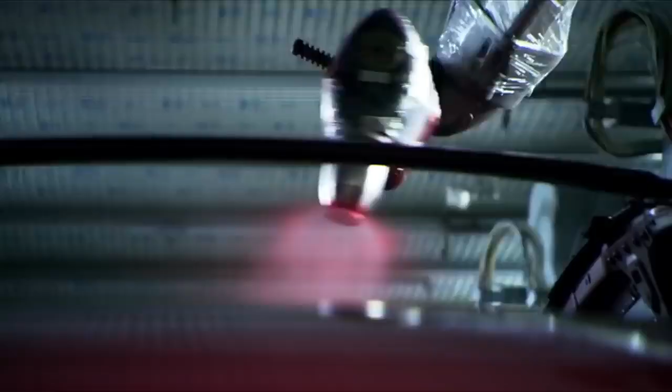This man has a vision to create the best electric cars ever seen and consign gasoline to history. This is something truly revolutionary. He wants to build his unprecedented Tesla car in a futuristic new factory and trigger an electric transport revolution. It's been a long time since something like that happened in the car business, but it's here. It's a dream many have had, but none have realized.

Aluminium bodywork, 19-inch alloys, and a $50,000 price tag. At first glance, this car is the latest in a long line of high-end sedans. But that is where the similarities end. The Model S is a totally different type of car. Tesla believe it can lead a revolution and change the face of motoring forever.

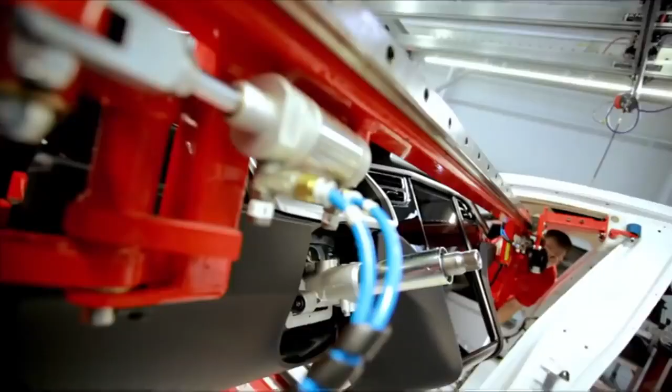It's the first ever mass-made premium sedan powered purely by electricity. Designed to have speed and range, and not a drop of gas. Our goal is to create an electric car that is the best car in the world and show that that's what an electric car can be. Tesla's goal is to kill off the combustion engine and prove the electric car has finally come of age. Driving a gasoline car is going to feel like yesterday. Driving this car is driving the future.

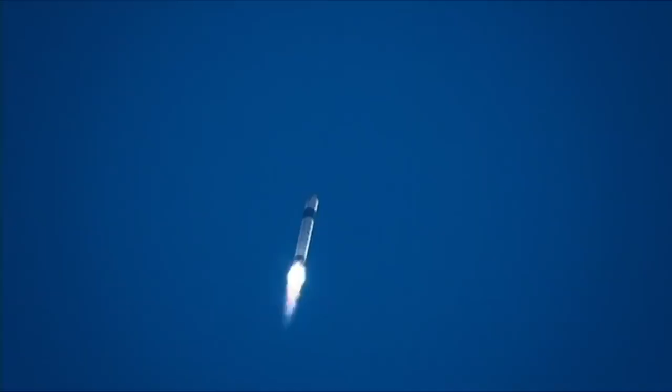This is Elon Musk, Tesla's co-founder and CEO. Elon is an inventor and a maverick entrepreneur, one of America's youngest billionaires. I like exploring, I like technology, I like creating things that have never been seen before or even imagined before. He is a genuine Silicon Valley success story. In the mid-1990s, Elon set up a small internet company. By 2002, he'd sold PayPal for $1.5 billion. Next, he founded private rocket company SpaceX. It's all part of Elon's life mission.

When I was in college, I tried to think about, well, what are the areas that would most affect the future of humanity? So the three things were the internet, making life multiplanetary, and the third being sustainable energy. So that's what really ties together my companies, is that sort of thought from 20 years ago. Tesla Motors is Elon's sustainable energy brainchild. Named after electric power pioneer Nikola Tesla, it's a car company that only makes totally electric vehicles. No hybrid and no alternative fuels. Absolutely no tailpipe. The company estimates their electric cars cause 50% less CO2, even if much of the electricity comes from a coal-powered plant.

It's technology Elon and co-founder J.B. Straubel believe we need. We're solving problems for our children, our grandchildren. Oil is a finite resource, and eventually we have to find alternatives. When you take that oil out of the ground and you burn it, it's extremely dangerous. We should not play Russian roulette with the atmosphere. We only got one. Tesla's founders have a vision of a world without gasoline cars. They are convinced electric is not only cleaner, but better. Now, they want to prove it to the world.

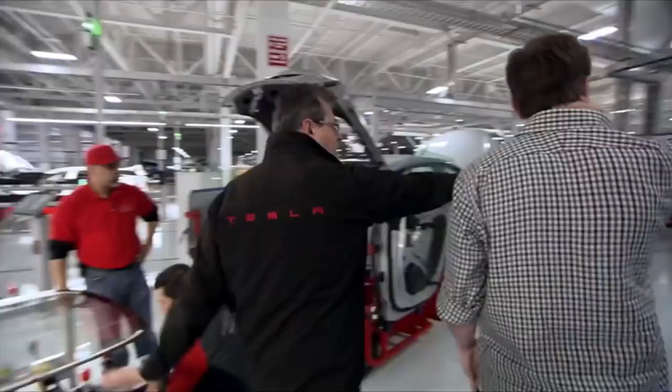Elon brings in Gilbert Passin as head of manufacturing. Gilbert is an expert from one of Toyota's award-winning plants in Canada. His description of my job to me was very simple. You know, you've got to create the best factory in the world with the best people in the world and make the best premium car sedan. And I said, okay, so where's the factory? Well, you have to find one. Where's the team? Well, you have to make one.

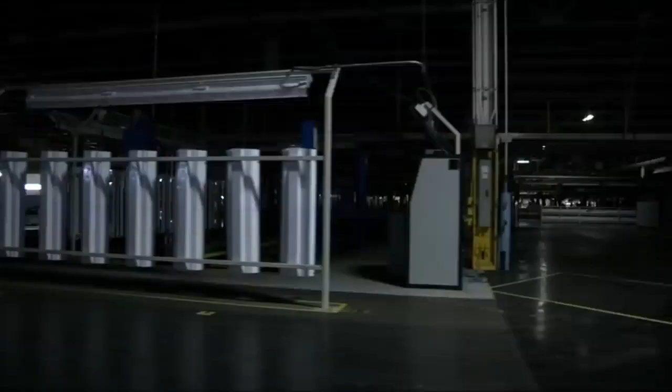The company purchased a former GM and Toyota site in Fremont, California, on the edge of Silicon Valley. The abandoned facility is a traditional car factory. Dark, little natural light, bare concrete floors. When Tesla Motors move in, it's the birth of a mega factory like no other. It's a totally fresh approach to car manufacture.

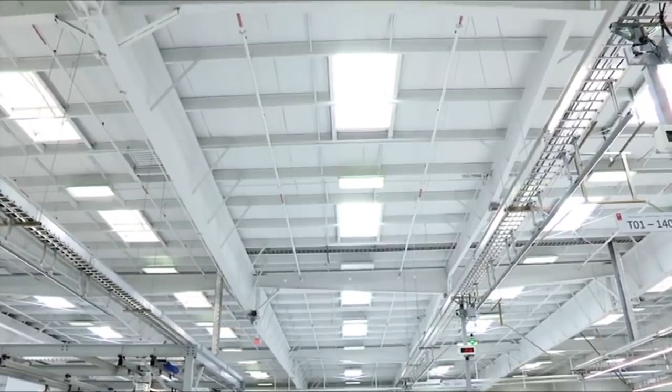The walls and floors are painted white. The machinery a striking red. Skylights and windows flood the factory with sunlight. If you make the factory pristine and clean, that sets the tone for the vehicle. We want that same sense of quality and precision in the car itself.

As part of the whole company ethos, bikes are provided so the workers can get around the factory. I think it's important to have an environment where people look forward to coming to work. So it's worth putting some effort into making the factory beautiful.

In true Silicon Valley style, they fill the space with the most advanced technology, creating an automated production line capable of building tens of thousands of cars. Super efficient multitasking robots, self-guided smart carts, and computerized production schedulers. The factory is designed to be up there with the very best in the world.

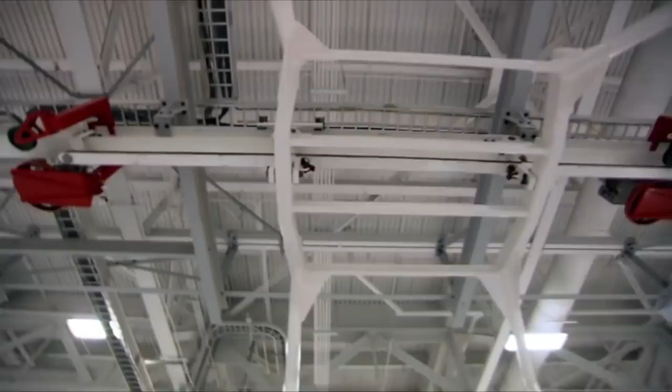We love engineering. We love beautiful machines. We love new technology. We love to innovate with high technology. And also in manufacturing, we love to do that. Without training, these sophisticated robots are useless. They all need to be taught before they can run tasks automatically.

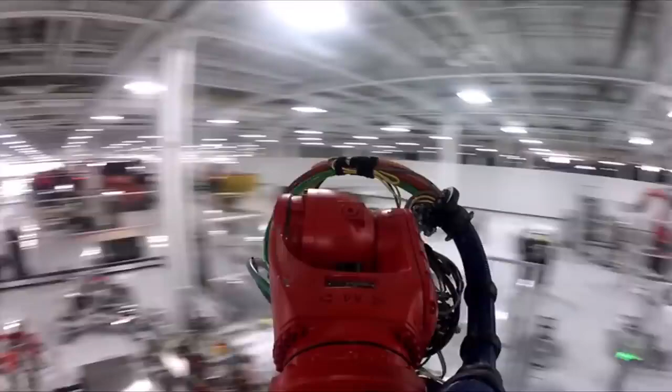Every robot is programmed by hand. The Tesla team has meticulously trained 130 sophisticated robots over a year and a half. One of the last robots still to be programmed is a multi-point welding robot. It will be used to join the car's underbody. These are pretty busy robots, so we gotta make sure that our takt time is good.

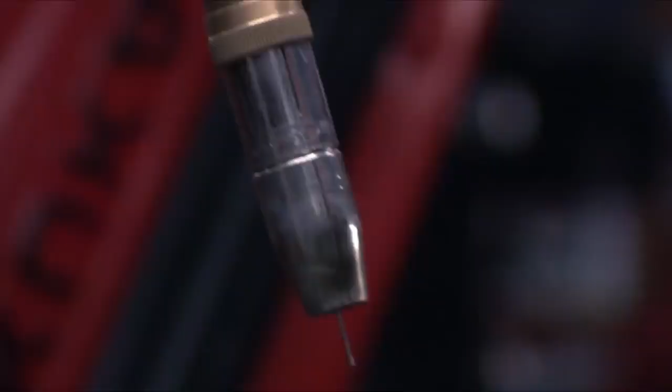A robot's work is only as good as the man who trains it. Brad Johnson is a welder with over 25 years' experience at the highest level. Getting this done today, we'll have the teachings all nice and smooth, and then we can start running 100% in full automatic. That sounds good.

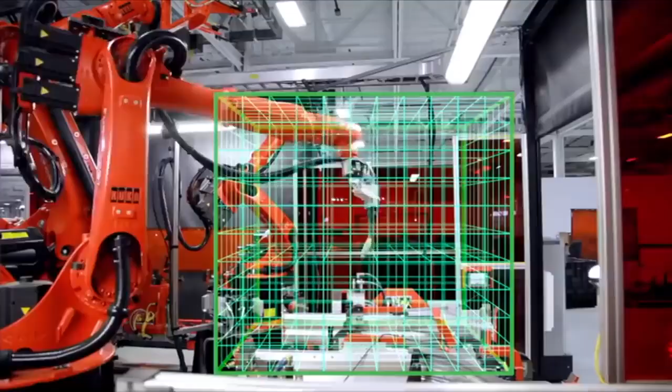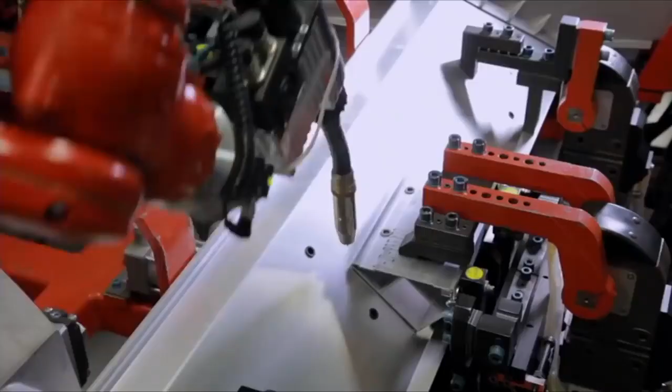The space in which the robot operates is treated as a three-dimensional grid. The head can be manually guided to any point using a teach pendant. There's our start point and our weld position. Brad guides the robot millimeter by millimeter and uploads the coordinates. The robot works out the most efficient route and runs the program.

Looks like the teaching is right on mark, and we have a really good quality weld right here. So we should be able to run full auto with this weld. When full production begins, Brad's handiwork will be exactly replicated by the robot 100 times a day.

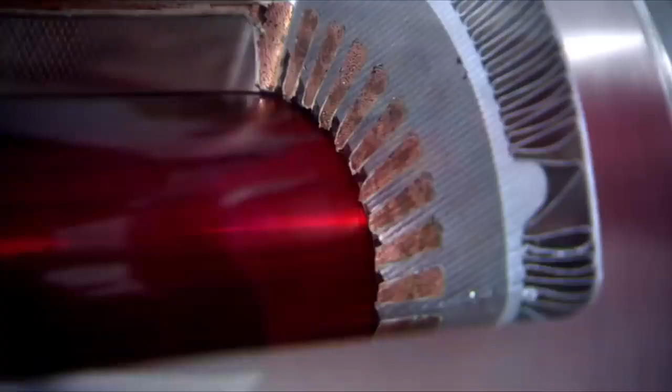Since their inception in 2003, Tesla Motors have been pursuing their electric car revolution with a step-by-step strategy. In an unconventional business move, Elon decreed that Tesla must invest in their reputation first and worry about profit later. Stage 1. Make a small number of high-value cars that prove electric power can be desirable. The Tesla master plan is very simple. We start off creating an expensive, low-volume car to help break the mold in electric vehicles.

Plan in place, they set to work on their first car, basing it around the British-built Lotus Elise. 5 years later, they released the Tesla Roadster. Quicker off the blocks than an Aston Martin Vantage, the electric sports car astonishes the motoring world. Step 1 complete in the Tesla strategy. What we showed was that an electric car could be sexy, it could be fast, and it could be long range. And that if you produce such a car, that people would buy it. But as a $100,000 two-seat sports car, it's a luxury second vehicle to most of its owners.

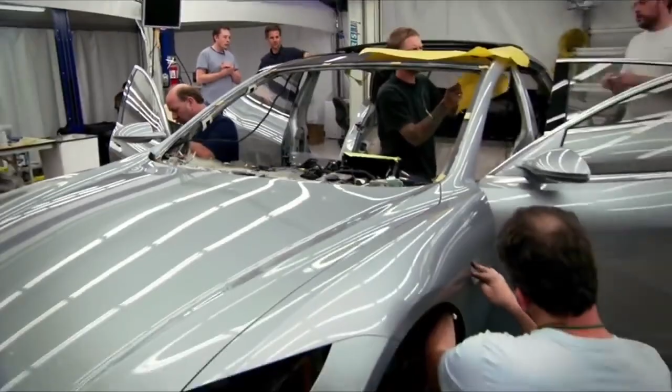Time for the pivotal Stage 2 in the master plan. A car that costs half as much and sells in much bigger numbers. A very important step in the Tesla strategy is really going to show that a mainstream electric car can be better than a gasoline car. The Model S is the second step in Elon Musk's vision of an electric revolution. A premium mass-market sedan designed and built from the ground up by Tesla.

At the studio in Los Angeles, they are working to craft that car. The Model S is really the foundation of Tesla. It's the first true product designed, engineered, built, manufactured by Tesla. And it's really the beginning of what our mission is about.

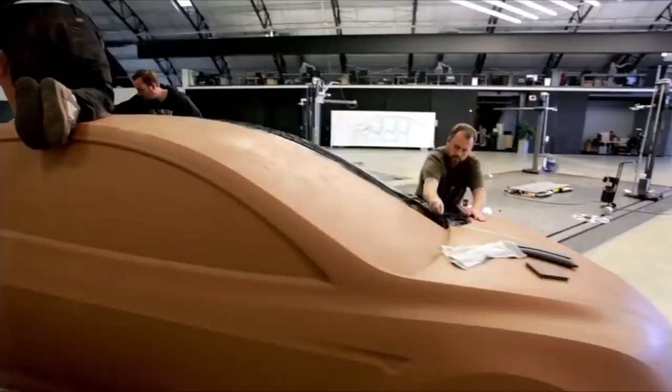Franz von Holzhausen is the chief designer. He believes Tesla's design needs to have some conventional appeal. It's really easy to have a clean slate and go pretty crazy with that. We had to start with something that people could relate to. If they even knew or cared that it was an electric vehicle, they were attracted to it.

We've stretched the sedan and made it a little bit more modern, but it's still a sedan. It still has this somewhat traditional cue, and so it's easy to love because of that association. Although uniform in appearance, the Model S is a unique car. It was conceived as electric. Even the shape is designed to maximize the battery's range.

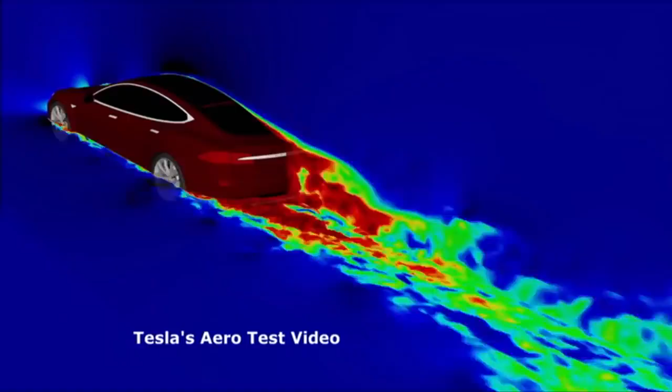And the body and the waist here is all slim, so there's no excess fat or body mass on this car. And that's another one of those elements that just translates into great efficiency. This car is one of the most aerodynamic sedans on the market. In an electric car, conserving the battery power is so important, the designers put huge efforts into reducing the drag. Even the door handles are aerodynamic, receding flush into the body.

But it's the interior that is most heavily influenced by the electric powertrain. The powertrain is incredibly small. You get the same performance out of a motor that's the size of a watermelon, that fits between the rear wheels, and everything else above that is what I call the opportunity space.

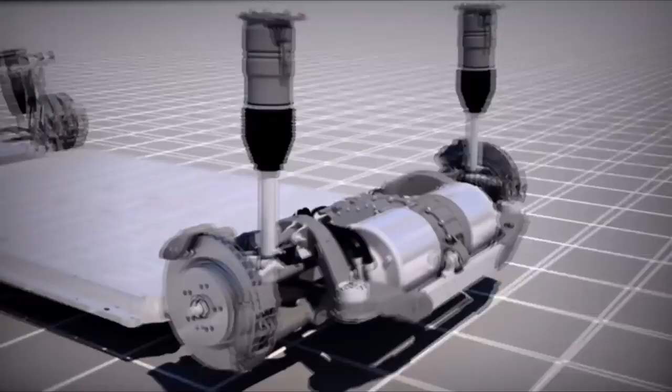The design team started with the motor and flat battery pack and worked upwards. With the motor next to the wheels, there's no need for a drive shaft, so there is no rise under the rear middle seat. There is no fuel tank or transmission. The Model S has free space from the floor upwards.

What you'll see is a vast amount of space. In fact, it's actually so big that we decided that we could actually fit 7 people, and we do that by putting 2 rear-facing child seats in the back here. And you can see where they fit here, and their legs go right down in there.

So this is what we call the frunk, and it's really the trunk in the front of the car. And arguably, you can put a whole bunch of stuff in here, even when the back of the car is totally loaded up with people and kids and stuff. And who doesn't need one of these?

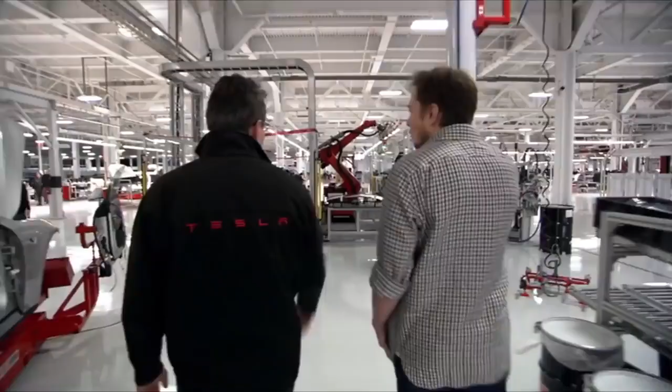Tesla promote these unique features at every opportunity. As a new marque, they're trying to make an impact in a marketplace crowded with established big hitters. Just looking at the United States, of the 3 other car companies, the youngest is 90 years old. So clearly this is not an industry that has been supportive of newcomers.

The Geneva Motor Show 2012. Another leg in the company's relentless promotional campaign. We're done selling Roadsters in North America, so this is our product. It's our product, Tesla product, and therefore we need to get it out to start selling.

Industry experts are judging Tesla on the Model S. It's seen as make or break. Maybe Tesla has a bright future. I think the Model S is very decisive to see if there will be a great future or if there won't be a future at all.

The company have taken the risk of collecting prepaid orders on the car. They've amassed nearly 10,000 advance sales. The financial boost also creates real pressure. I get harassed quite a bit actually by some people who have reservations, and it's a lot of expectations, very high expectations that we're going to have to meet and exceed, really. Some prepaid customers have been waiting up to 3 years for their car.

In return, they've been promised a delivery deadline. I do feel an incredibly strong obligation to those that have placed their faith in Tesla and put down deposits. I'll do anything to make sure that their faith is not misplaced. The delivery deadline for the first cars is now only 2 months away. But the brand new factory hasn't built a production car yet.

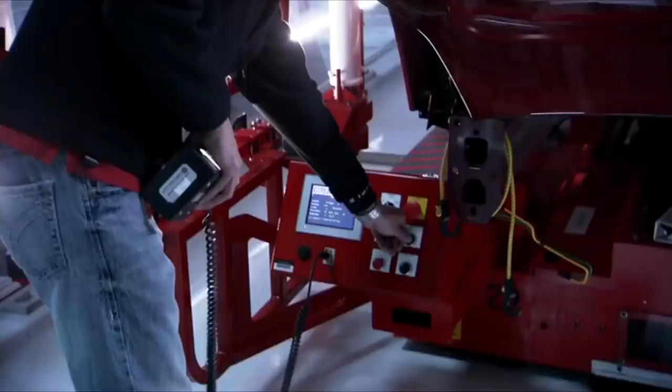But before mass production can begin, Gilbert and his team must prove the factory is ready. The company is relying on them to get it right. We have to make sure that car after car, the quality is there, everything is perfect along the way. So we are really gearing up towards a production ramp-up.

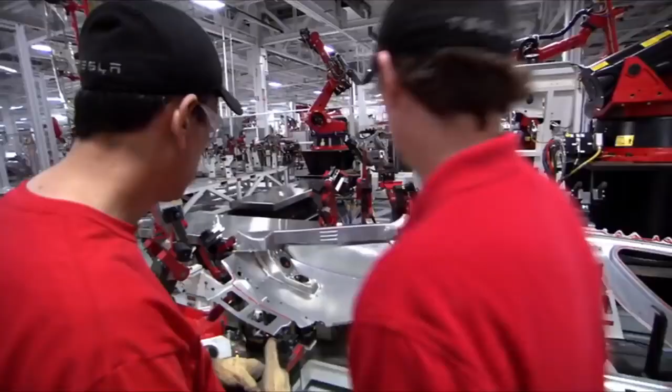Over the next few weeks, the factory will test manufacture a limited number of Model S. If the line doesn't perform with these cars, the company will be forced to miss their deadline. Tesla's electric revolution would be over before it started. A very, very important moment is the birth of Model S in our Tesla factory. And it's where the rubber is going to meet the road, so to speak.

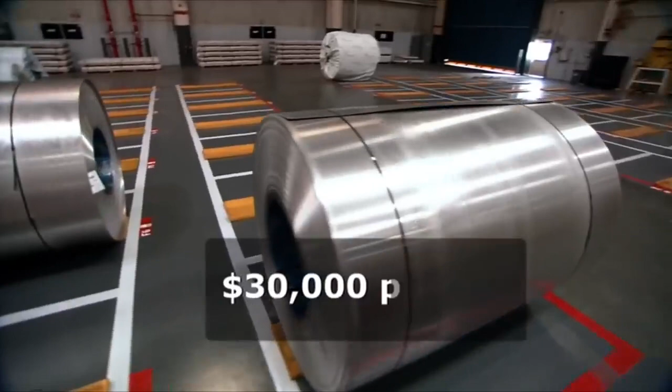The process begins in stamping. To increase the battery's range, the company have decided to build 97% of the Model S with lightweight aluminium. It's an extremely rare feature in a mass production car due to the cost. Every Model S starts as one of these. The roll is loaded into the mechanical cutting machine.

Once cut, the panels are passed to the stamping press. We need to translate flat pieces of aluminum into 3D forms. And how to do this with aluminum stamping with the level of quality that we expect is really, really challenging.

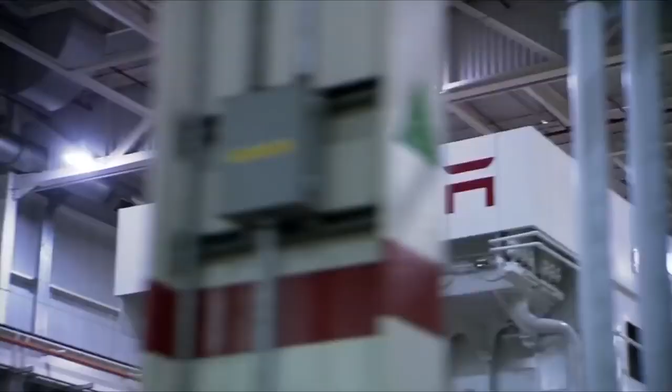To meet the challenge, they buy the largest available stamping press in North America. It's one of the first pieces of equipment they install. Over 3 stories high, it has to be transported from Detroit on 70 trains and then entirely rebuilt.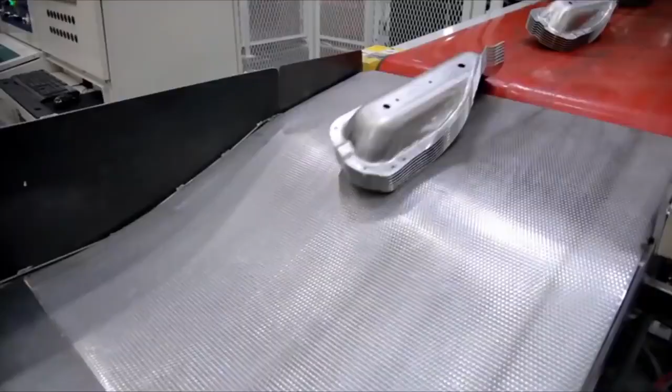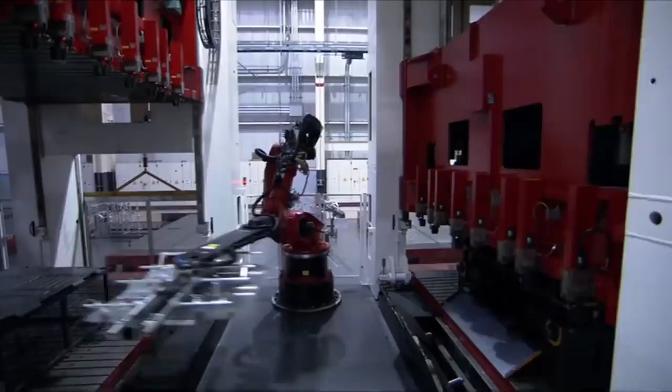The immense pressure from the stamp allows them to press the complex body shapes needed for the Model S. It can be mounted with different heads, known as dies, that mold the panels into a wide variety of shapes. Robotic arms feed the 4 stamps. Each stage forces a more detailed 3D shape, producing stacks of floor plates.

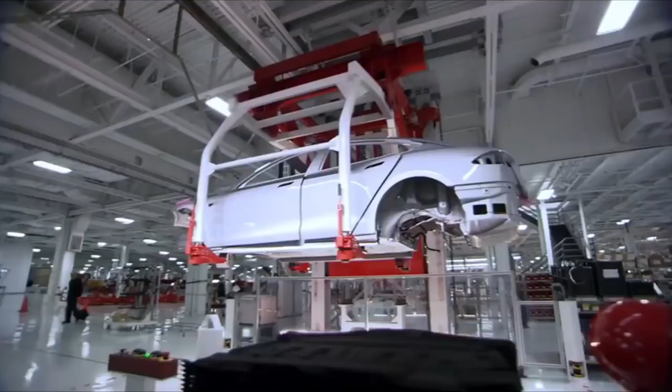These lightweight aluminium parts improve the Model S's power-to-weight ratio, which helps increase the performance and range. The 2 things that obsess co-founder and technical chief, J.B. Straubel. Any ideas on how we can make it better? Performance and range were the 2 big issues that needed to be improved, and that's where we've put most of our focus on the technology and powertrain.

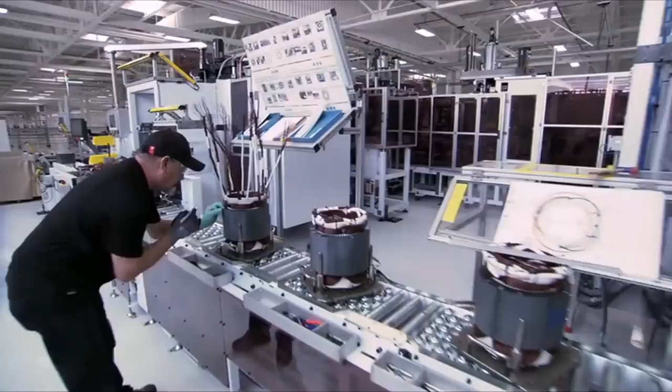Powertrain manufacture, 2nd floor. This is where they build the heart of the Model S, the motors and battery packs. Tesla know the electric powertrain will define their cars, so they push to advance the technology themselves. This is an extremely exciting field where inventions continue to happen even faster than they did in the years previous.

Tesla's solution to improving battery life appears startlingly simple. They use thousands of small lithium-ion cells, similar to laptop batteries. Thanks to these regular batteries, the company say the Model S has achieved a top range of 480 kilometers. Once you have 250 to 300 miles of range, then you're in a different usage mode. You're in a range that is equivalent to most gasoline cars.

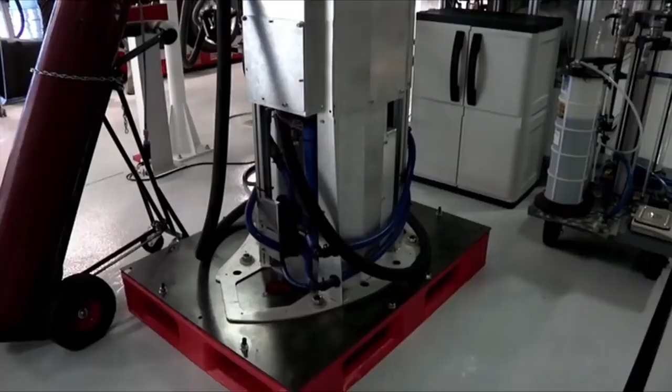The car can be charged by 100 kilometers every hour from a regular power outlet. Ultimately, Tesla are hoping to install superchargers along major highways that can charge the car to capacity in 45 minutes. You can charge the car up every night, but you don't need to. You can actually charge it once a week.

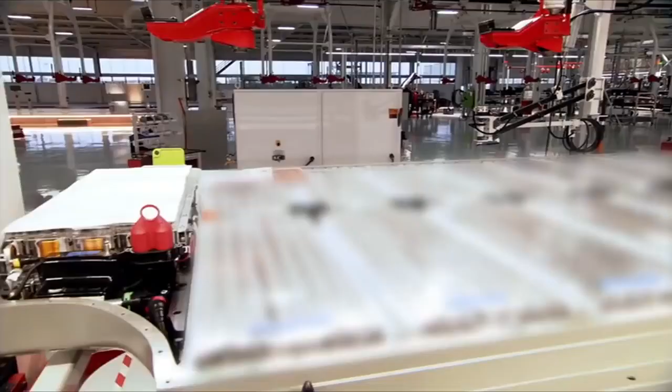The high-performance battery pack is formed with over 7,000 small cells. They're organized into a flat layer with specific groupings of positive and negative. The final layout is the key to the pack's power and range, and Tesla considers it absolutely top secret.

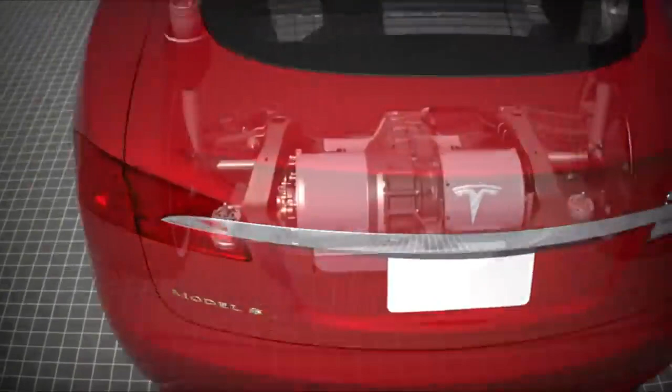The motor unit is also developed in-house. It's essentially an AC induction motor, a concept invented by 19th century scientist and Tesla Motors namesake, Nikola Tesla. He harnessed an electromagnetic field to turn a basic motor. Modern-day Tesla has developed their motor with a highly conductive copper cylinder. When the electromagnetic casing is fed with current, the copper cylinder inside starts to spin.

It's nearly 3 times more efficient than a combustion engine. In fact, there are only 3 moving parts. It connects directly to the rear wheels and doesn't need a transmission. These are the 3 moving parts in the whole Model S powertrain.

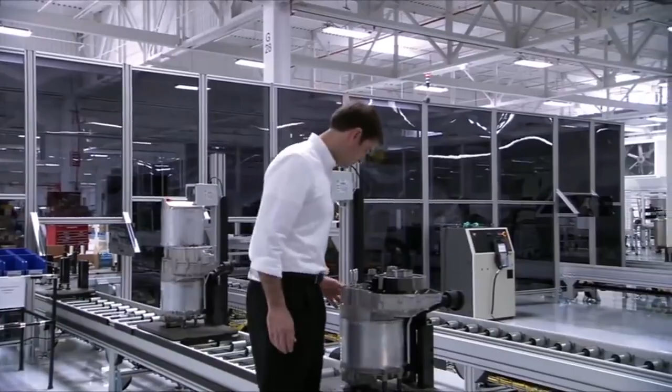One of the cool things also with this very simple gearbox is that when we want to go in reverse in the car and back up, all we have to do is spin the motor in the other direction, and the car backs up. We don't need a clutch, we don't need a separate gear for reverse. The entire drive unit is under 1 meter long, smaller than a golf bag. But it propels the Model S, a family-sized sedan, into the class of performance cars.

In fact, this powertrain creates a totally different driving experience. Program Director Jerome Guillen works constantly to refine it. As with the light switch, electric power can be fully applied instantly. The first thing that's going to surprise people is how much torque you get so quickly. That instant response, you cannot really mess with the throttle too much, because if you push on it, then the car will go.

Even from a stop, you have a very quick takeoff, because basically the torque is instant. So if I stop here and then I start, you will see that we have an acceleration right from the beginning. Any speed, you have that same torque available. So it's very easy to pass a car or to get out of harm's way if needed. Unlike gasoline cars, which have to change gears, the Model S can accelerate to top speed totally uninterrupted.

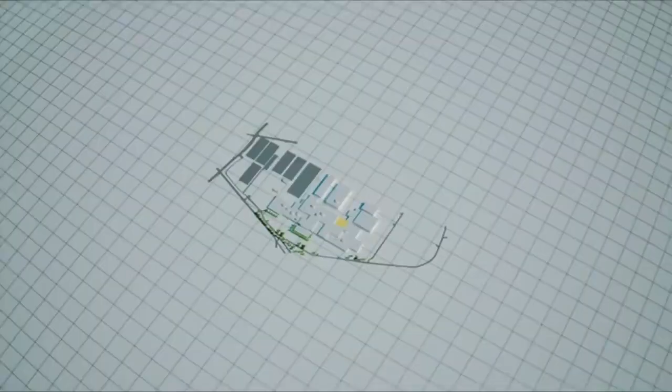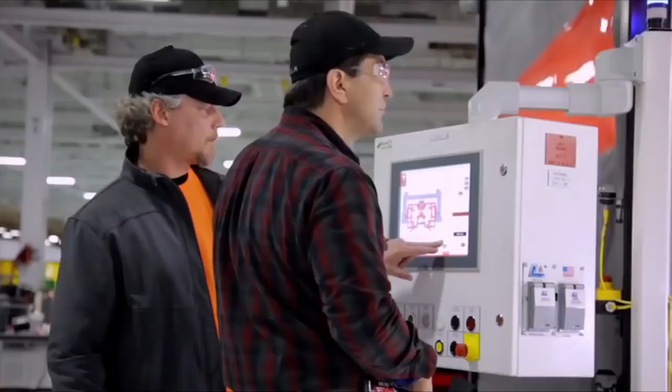In the factory, the delivery deadline is now fast approaching. The Model S test production cycle reaches the main assembly area. The car is based around an aluminum underbody. To make it, engineers weld struts and casts into a framework. Brad's newly trained welding robot is about to be tested in full automation. They have trained the robots with prototype parts. Now, with final components coming through successfully from stamping, it's automated production for real.

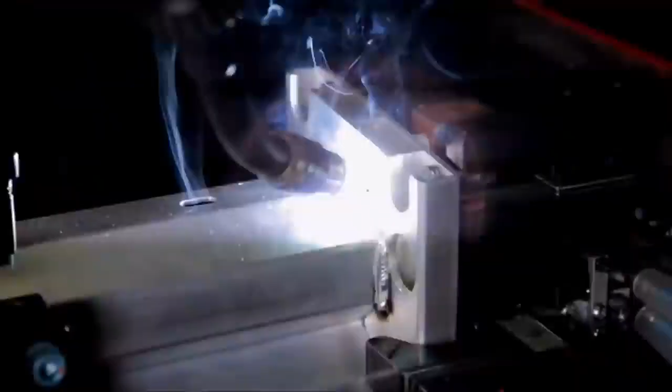Under observation, it's a tense time for the team. The robots work in a tightly coordinated chain. The second phase hits an issue. It shuts the whole process down.

With the deadline looming, Elon Musk is determined to keep Tesla's waiting customers happy. He's organized a Model S test drive event for the people who've placed deposits. The test ride will go out onto Jack Northrop Boulevard, so you'll get a chance to see that this isn't some show car that doesn't actually do what it says. It will go fast and with a lot of people in it. And quiet. Quietly, yeah.

Many have prepaid years ago, and it's their first time inside a drivable Model S. Customer and board member Steve Jurvetson captures his experience on his mobile phone. Wow, this is insanely cool. It's a surreal scene. It's way cooler than I can imagine. You really definitely saw it. Yeah, it's nice. The first ride has to be documented here.

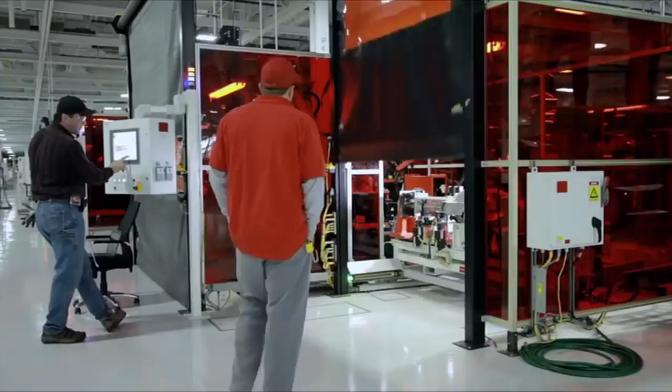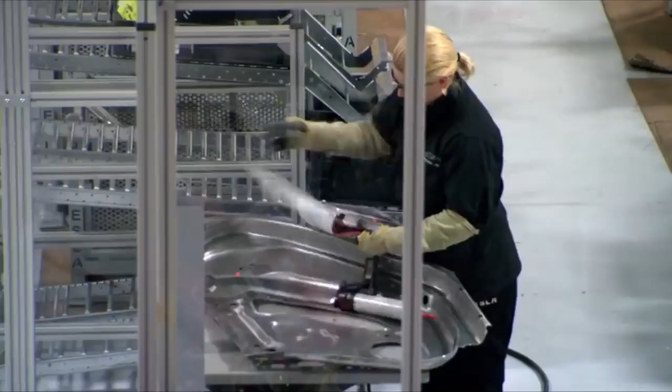The event seems a success. Now the company need to make sure the customers get their Model S's as promised. With only weeks to go, welding has hit a glitch in automation. One of the robotic clamps is millimeters out of line. It's a tiny difference, but enough to disrupt the process. With the way the robots work and how we have such a tight tolerance of 1 millimeter to stay on, sometimes the new parts won't reach a prox, or the clamp won't close all the way. A major delay will disrupt the whole production schedule and threaten the deadline.

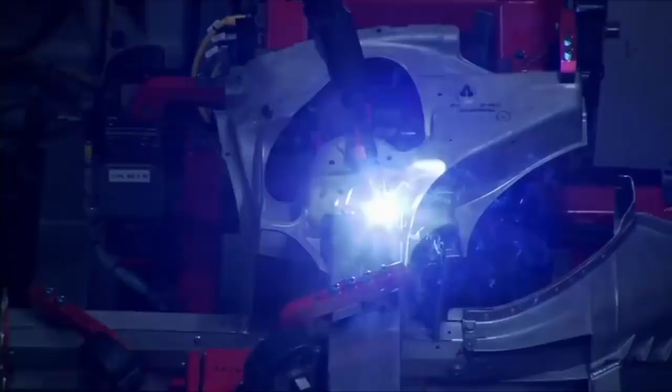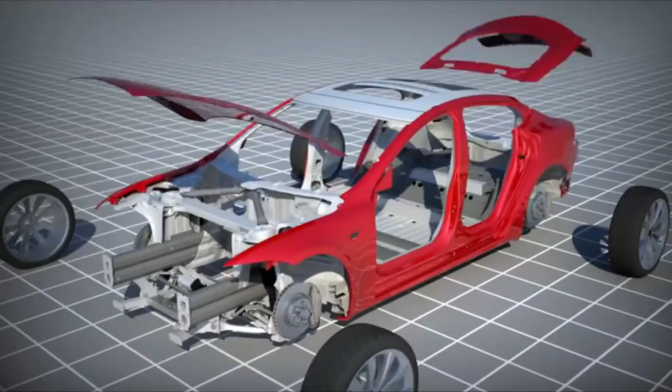They adjust the settings and set the robots in motion again. This time, it goes off without a hitch. To the team's relief, the process can be approved for mass production. The run through the automated line reaches the Model S exterior. The Model S body is made up of 14 different sections. To speed the workflow, Tesla construct each section at separate sub-assemblies.

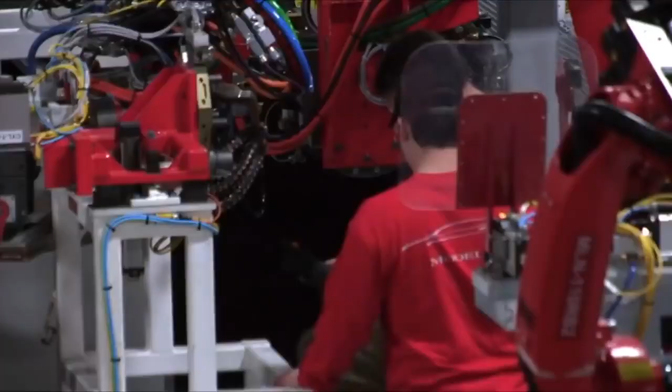Door sub-assembly. The internal frame is joined to the exterior panel. As the robot's pincers come together, they fire a rivet and join the aluminium sheets. Over to the right, side body sub-assembly. One of the most advanced aspects of Tesla's robots is that each arm can perform a variety of different tasks. We have to use all the gamut of technology to make the aluminum joint between stamping and welding and riveting and bonding and all these things using robots that are multitasking.

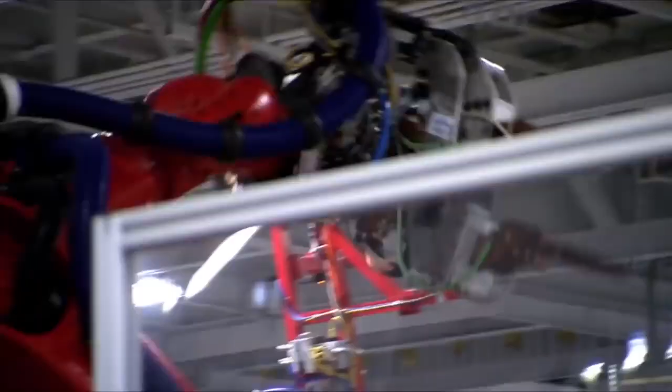This flexibility is essential for a compact and efficient workflow. A robot can spot weld using a pincer tool and then automatically detach the pincer and pick up a clamp tool. The same arm that joined the panels can now move it to the next station. It's clever, but tricky and needs constant refining.

When you draw something yourself, you take a pencil, you take an eraser with the same hand, right? And then you change the tool, so to speak. Same thing here. Once assembled, the sections are brought together at body assembly. Here, they're riveted around the welded underbody to form the basic shell of the car.

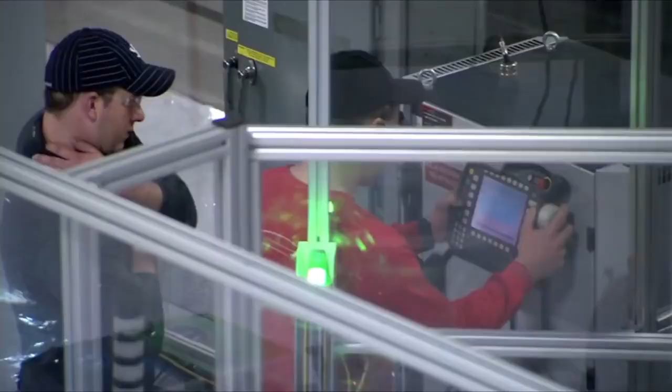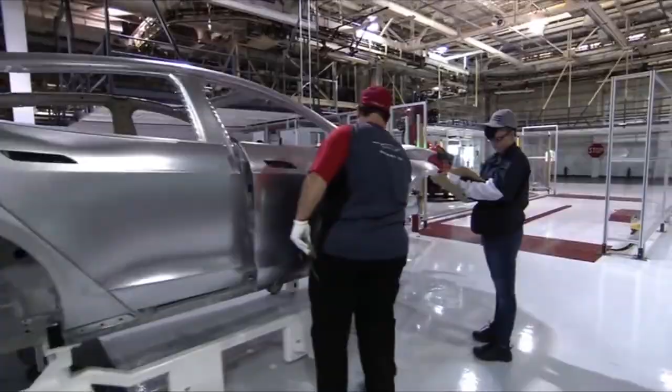All the sections are lined up alongside the central framing line. Gradually, the automated line builds up the side sections, ready to house the doors. A test batch of 3 cars is complete. Body assembly has demonstrated it can run successfully in full automation. It's a vital milestone in the countdown to mass production.

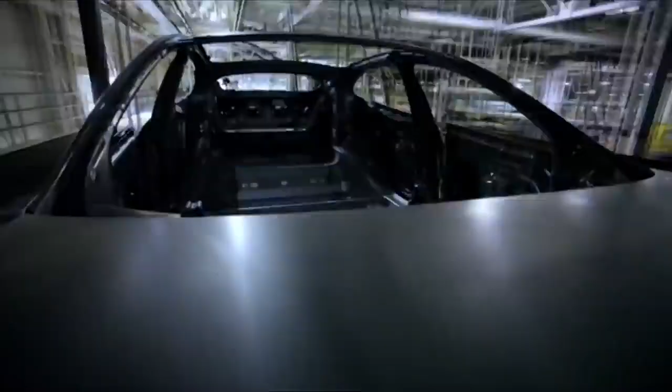Completely assembled, the aluminium body is now known as body in white. It's ready for some colour. The body in white is loaded onto an overhead train that carries it to the paint area. At this vast facility, the paint centre is in a totally separate building. The Fremont site covers nearly 95 football fields of space. It's so big, the Model S production line only fills 20% of it.

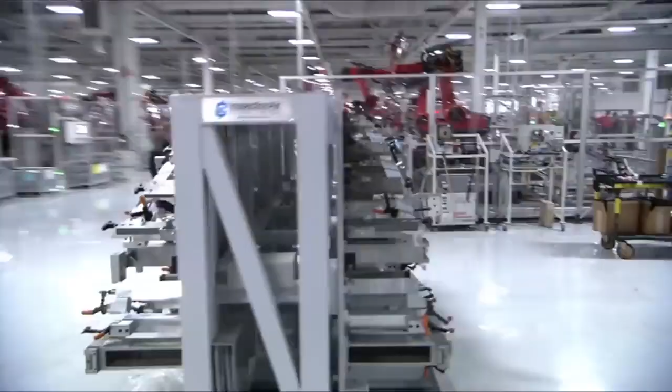For Gilbert Passin, the extra space is the cornerstone of Tesla's grand strategy for an electric revolution. The Tesla factory is huge. It's about 5 million square feet on 2 levels. Right now, we are only utilizing a small fraction of the space, but most of it, as you can see behind me, is what we call the dark side. It's sort of dark and not utilized yet, even though we have a lot of plans for the future on how to fully utilize this entire building.

These expanses are an integral part of the company's stage-by-stage building plan. They want to fill the space with a production line for a further range of Tesla vehicles. A very high-volume, economy-priced model, the Stage 3 car. In the future, we intend to expand our range of vehicles, maybe of a smaller size and also more affordable for the market. And this factory is ideal, and we are going to make this a super mega factory.

Long term, Fremont is meant to produce the low-cost Stage 3 electric car in the millions. It's the final step in Elon Musk's Tesla master plan. To really have widespread adoption of electric cars, we have our 3rd generation vehicle, which would be a low-price, high-volume vehicle, and that's really what's going to fill out the rest of this humongous factory. I'd love to bring this to 500,000 vehicles a year as soon as we can. The future of Elon's strategy first depends on the success of the Model S.

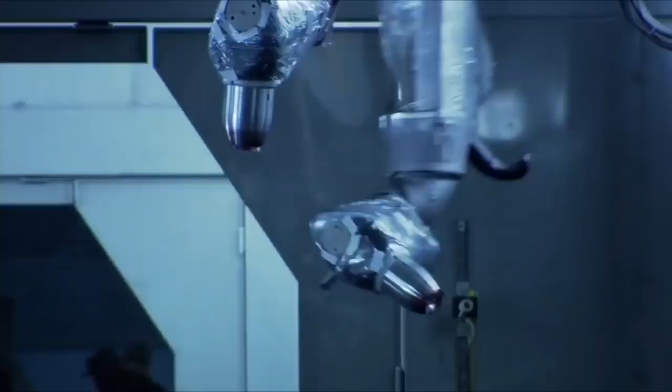In production, the time to the delivery deadline is now running low. The aluminium body arrives on the overhead train from Body Center. Paint Center. This is where they make the car look like a premium sedan. It's a state-of-the-art process. There's a lot of technology that goes into the Tesla car, but the very first thing they'll tell you is what color of Tesla car they bought. That's how important the paint is.

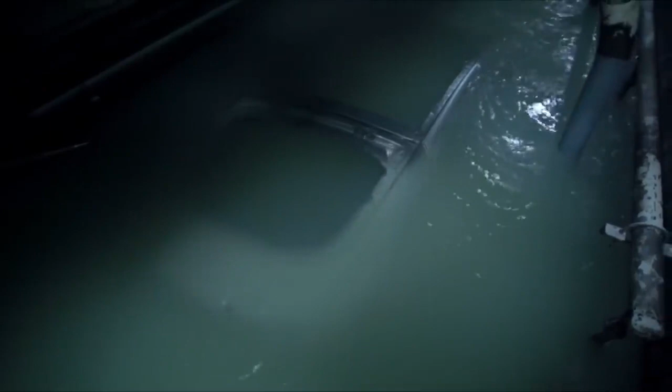First, a roller coaster ride of treatment baths. Detergent to clean the surface, and then electrocoating. The electrocoat helps attract the paint to the aluminium. The primed car is ready for colour. This vehicle will be sprayed with their trademark tint, what Tesla calls Signature Red. It's a color that we developed that's different than anybody else's red. It's been developed with glass flake to get the specific type of sparkle that we want to get in that paint.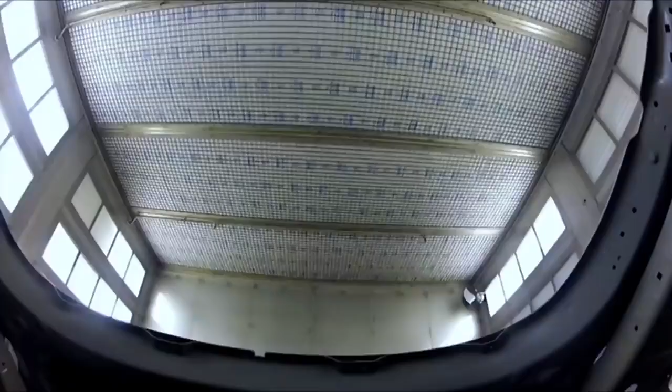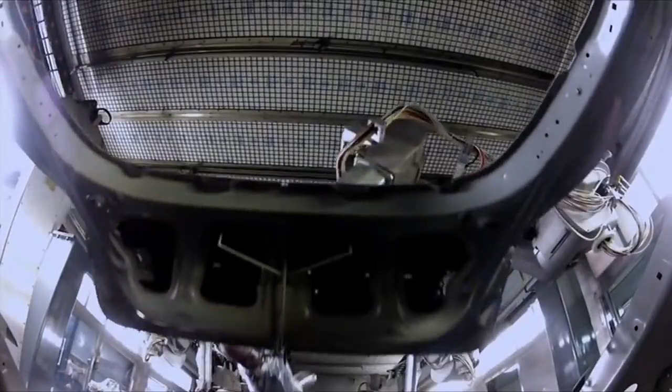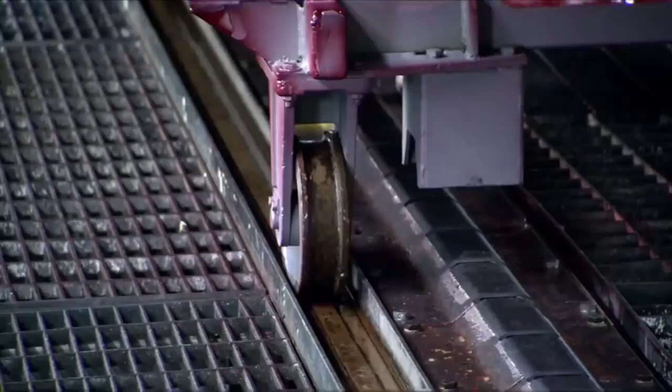It's a masterpiece of perfectly choreographed automation. Even the paint robots multitask, using a handle to open and close the doors. Once it's through, the painted body heads up into the ovens to be baked and double glazed. A specialist team spends hours assessing the finish before the car is passed.

Elon's made it very, very clear to us what his expectation is for the paint job. He wants our paint to look like glass, to look like a piano finish. That's the challenge we've been given, and that's what we're going to do. The Model S spends over a day and a half in paint. And that attention to detail carries through to general assembly.

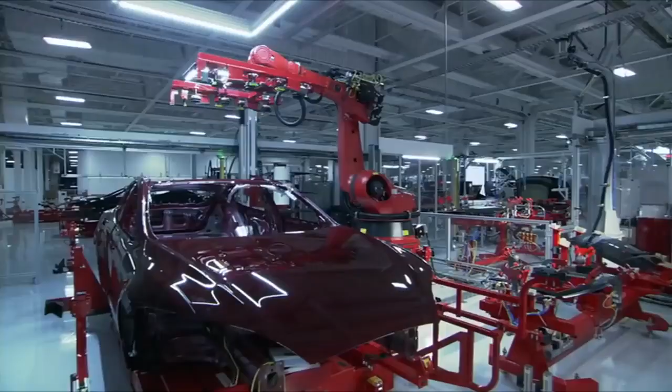First, the Model S's panoramic glass roof. The installation robot takes a picture of the top of the car. It uses the digital picture to measure the exact orientation and bond the glass.

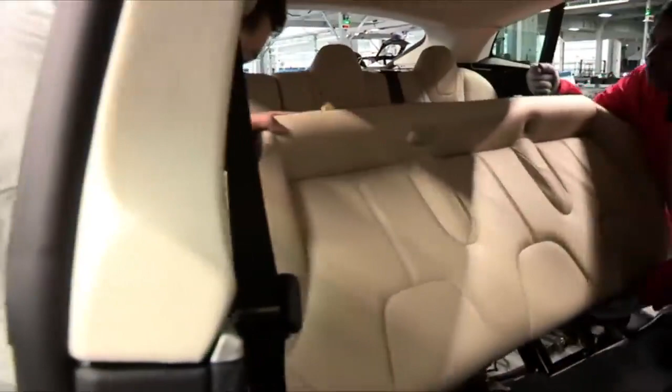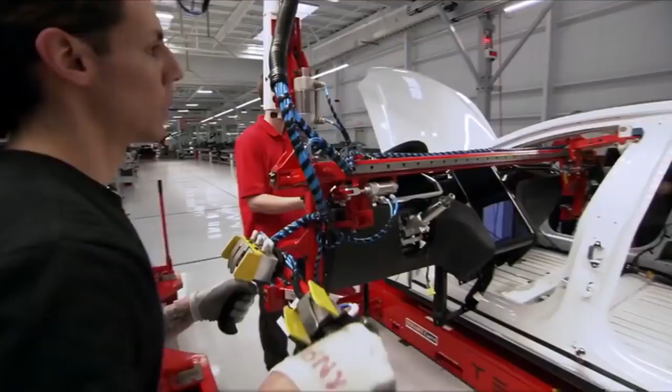Next, the interior. The wiring and seats are fitted. The aerodynamic door handles are installed. To get the delicate installation right, a wireless system adjusts the torque for each bolt. The cutting-edge dashboard is lowered into the car. It's proof the car is a product of the tech-savvy US West Coast.

The Model S carries a touchscreen tablet inspired by Tesla's Silicon Valley neighbors. Tesla is very much a Silicon Valley company that has a Silicon Valley operating system, which is similar to a Google or Facebook or Apple, joined together with a tremendous amount of great automotive expertise. It's about bringing the things that we're used to, our phones, our computers, and the interaction that we have with them into the car.

The car has a mobile 3G internet connection. The driver can download software upgrades and customize the display. The car's always connected to the internet, so we can understand your daybook, and we can know that you're going to work at 8 a.m. on Monday, and the car can be warmed up for that experience.

The entire command center is housed on the 17-inch tablet. The interior is virtually buttonless. It does some really amazing things. Not only does it make the rest of the interior super clean and really uncluttered, it allows you to have just amazing control of the car, and it's just a push of a button. Like magic.

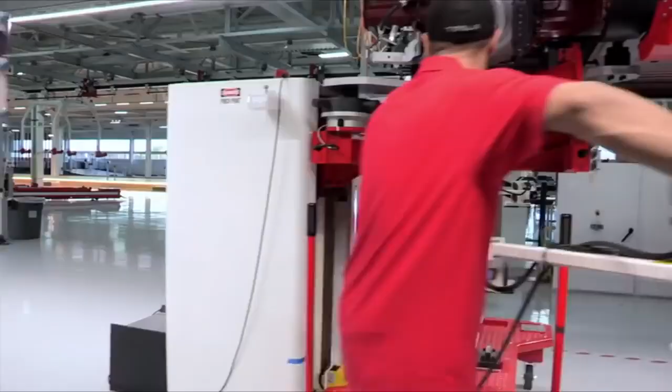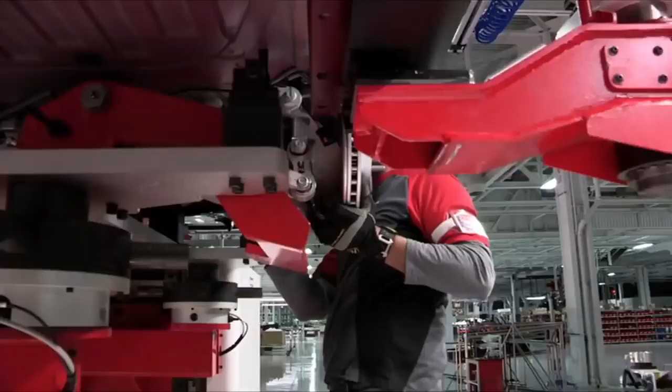At the factory, the start date for mass production is now only 2 weeks away. The first batch of test vehicles reaches the vital final stages: powertrain and body marriage. In gasoline cars, installing the drivetrain is a lengthy process. With electric, it can happen in just 2 steps. Step 1. The motor unit, complete with suspension and brakes, is bolted into the rear wheel berths. There is no drive shaft or transmission to be attached. In one motion, it's fitted.

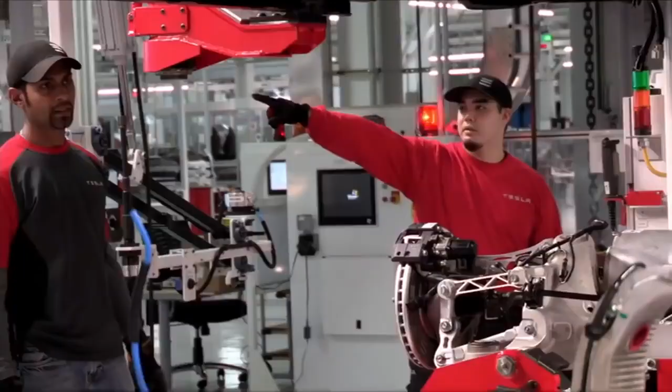Throughout the build, every single time you may hear me in the background saying, we're at 2 minutes, we're at 5 minutes, right? So they can know exactly where they are when we're shooting to get to that 4 minutes and 42 seconds. Step 2, battery pack installation. The pack's steel case acts as the car's chassis. Bolted into place, it gives the Model S its rigidity.

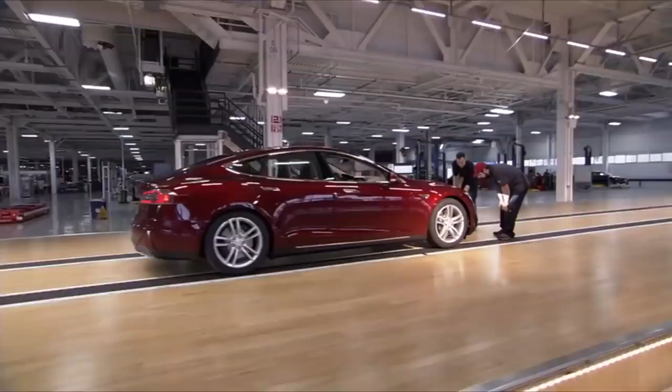A stage along, the first complete cars arrive at final inspection. At Elon's insistence, inspection happens on a bamboo platform. He believes you can only judge a car's beauty if it's framed by beautiful surroundings. The last check is the test drive. At Tesla, the track is very different. Because electric cars produce no exhaust fumes, they can be driven indoors.

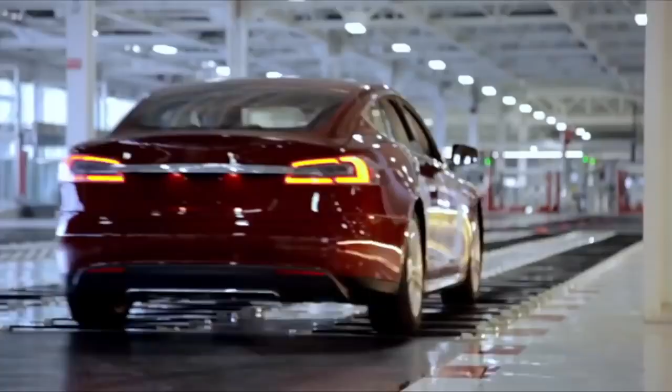Our people have done so well at putting this car together. You can see the remarkable quality of the paint and the entire vehicle, the body fit and everything. I'm so proud today. This is the first Model S to pass through the production test run. And its quality proves the new megafactory is ready for mass production. It's a big moment for the company.

Just to see this car going around the test track here, it really demonstrates the fact that the Tesla factory is ready to go. I just have to make 20,000 per year more of this kind, and it's sort of a done deal. We just have to get it done. The factory can now push towards the delivery deadline, allowing Tesla to pursue their strategy for an electric car revolution.

Can you imagine if all the cars in the world were able to have zero emission, zero noise, and we could do that in a perfectly clean environment? That would be so cool. This is Tesla's vision of an all-electric future. No fumes or heat. No noise or dirt. No expensive gasoline. Just clean and quiet streets.

It's truly impressive to see how we are really day by day and person by person changing people's thinking about what electric vehicles are versus what we've all grown up and taken for granted. If we can do that through one product, that's unbelievable. "10 years from now, Tesla will change the perception of what mainstream cars can be. And it'll become clear that electric cars truly are the future." The Tesla Megafactory may have just built its place in history.